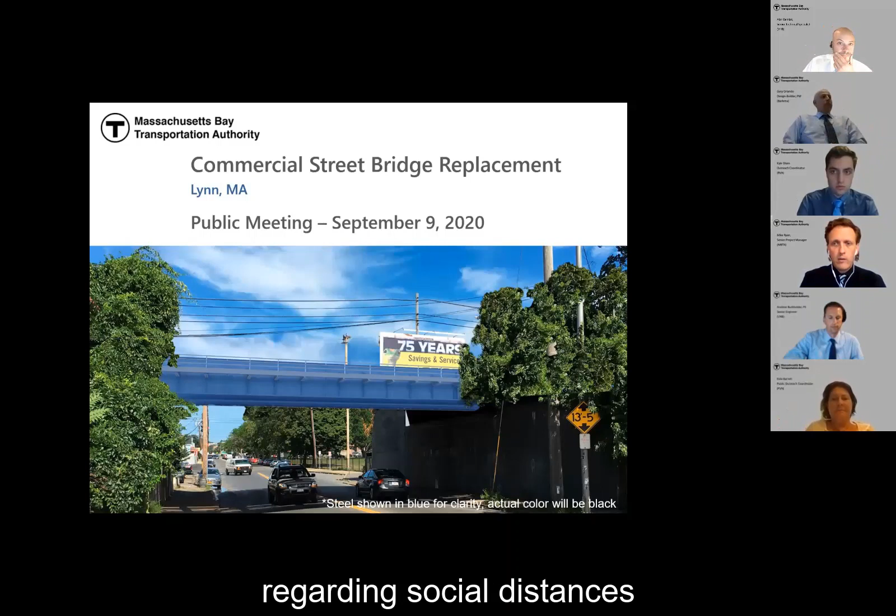An update on the governor's modified open meeting regulations. On March 12, 2020, Governor Baker issued an executive order modifying certain requirements of the open meeting law to enable public bodies to carry out their responsibilities while adhering to the public health recommendations regarding social distancing.

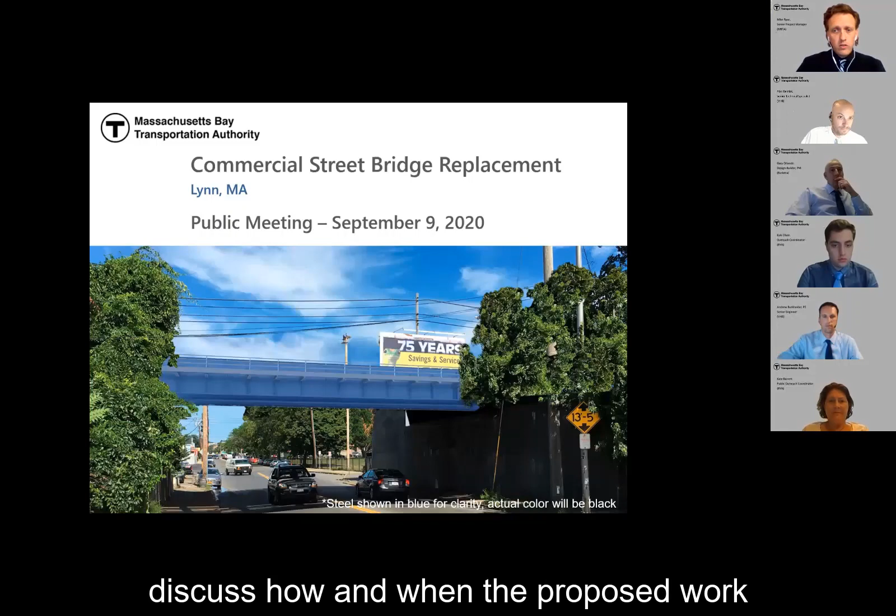We look forward to hearing your comments and questions after the presentation. First, we'll start with an overview of the project history, scope of work, and schedule. We'll discuss how and when the proposed work may affect you. This is an important project and a key component to our continuing efforts to improve the state of good repair of the commuter rail system.

The Commercial Street Bridge was originally built in 1913 and is approaching its end of useful lifespan. While we're here today discussing the Commercial Street Bridge replacement, I want to share that this is part of a larger design build program. This program includes the replacement of 6 different bridges, all contained within a single program, where Commercial Street is one of those bridges.

Accompanying me as part of this meeting is a representative from our design build team from Barletta and VHB, who I've asked to provide some additional detail and context related to the Commercial Street bridge replacement. Thank you again for your time. With that, I'll turn it over to Bob from VHB to start the presentation.

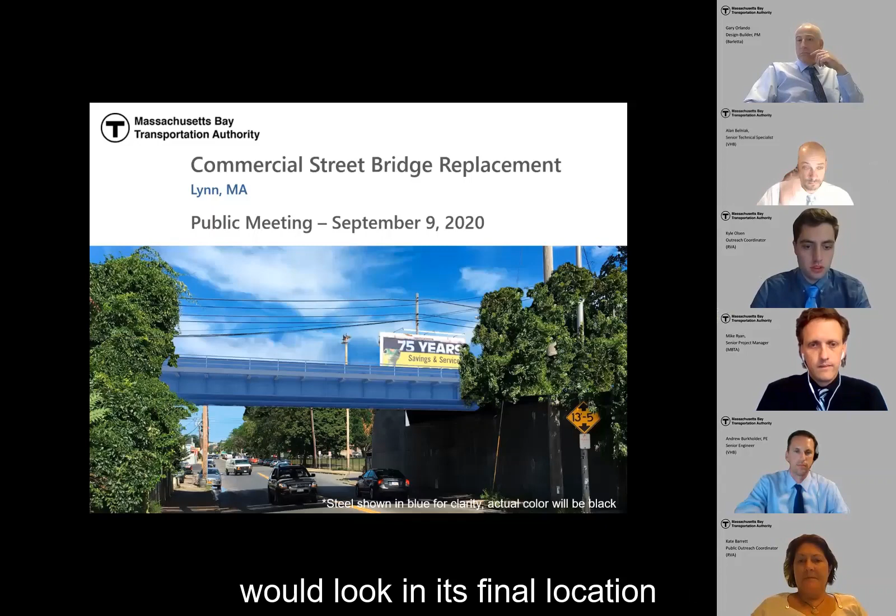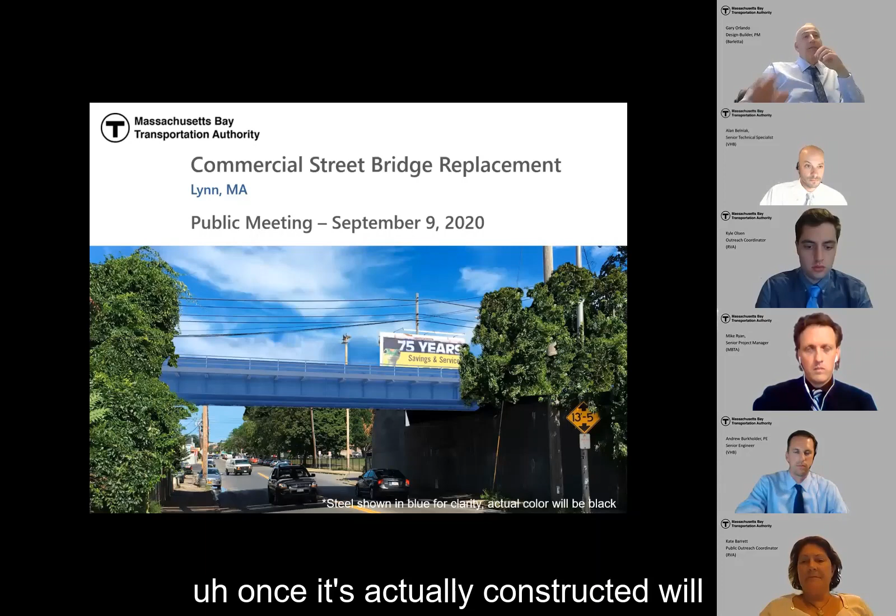Just as a point of reference, the steel, the bridge superstructure, which is the top portion of the bridge, is shown in shades of blue. That's intentional to help provide clarity in the renderings and other photos you'll see in this presentation. But the actual color of the steel, once constructed, will be black. I just wanted to point out that difference.

As Mike mentioned, himself as the MBTA Senior Project Manager for this project, Gary Orlando is the project manager from Barletta Heavy Division. Myself, Bob Penfield, I'm the design manager working for VHB, and my counterpart, Andrew Burkholder, is our senior engineer, also from VHB. We'll be meeting with you today.

So an overview of what we're here to talk about today. First, as Mike mentioned, we're going to have a quick overview of this project and its context and how it sits within a larger design build program. Then we'll get into specifics about this particular bridge: the site location and existing conditions, the project needs and goals, the proposed bridge layout and design, the construction staging, and the traffic impacts we'll see during those different construction stages.

Then we'll discuss the project schedule. Following that, we'll provide some additional opportunities for public outreach, and then we'll open the floor to any questions you might have.

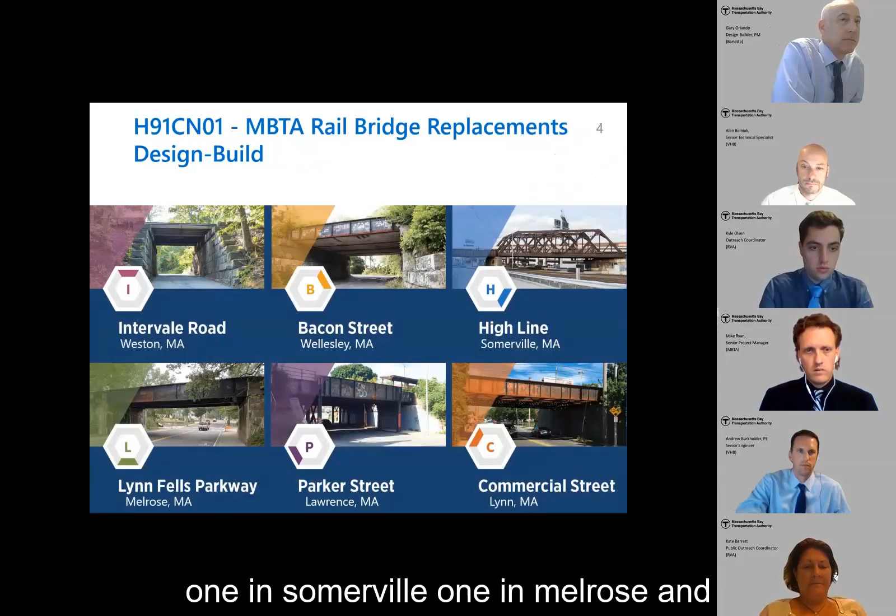As Mike mentioned, this particular project, Commercial Street, is one of 6 bridges being replaced as part of this larger design build program. We've got a bridge in Weston, one in Wellesley, one in Somerville, one in Melrose, and another in Lawrence, in addition to the one here in Lynn.

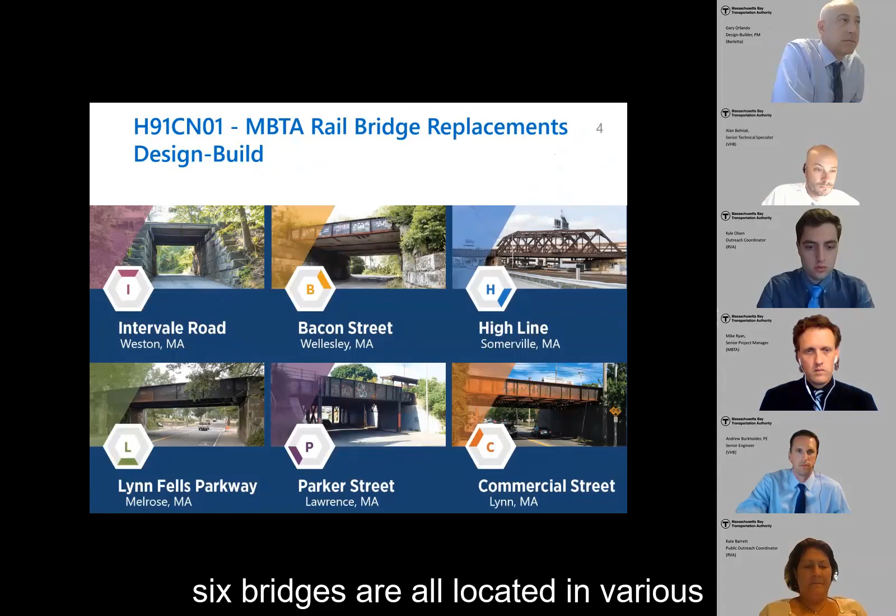As you can see, all of these 6 bridges are all located in various locations within the MBTA's commuter rail system. In our case here, we're on the Newburyport/Rockport line.

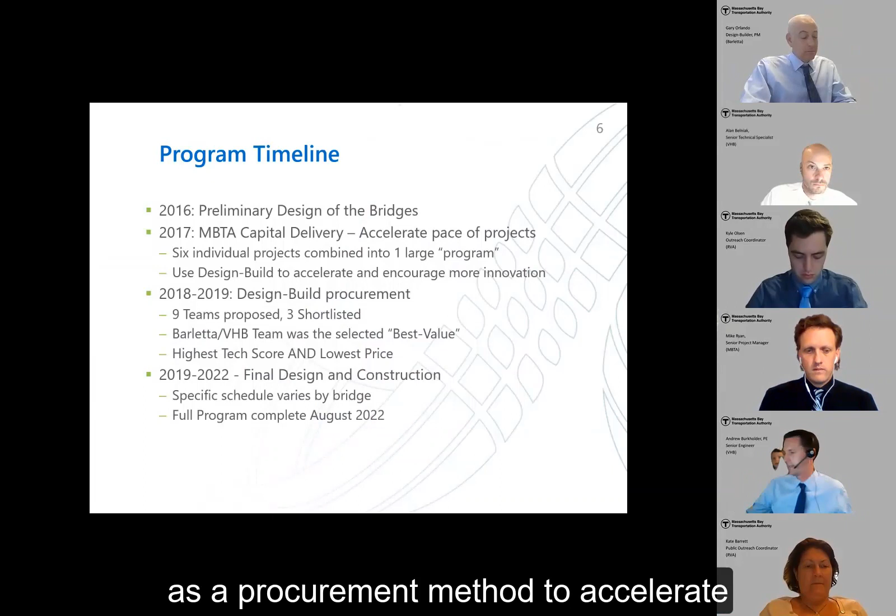To give you an idea of the program timeline, back in 2016 the preliminary design of each of these 6 bridges had begun. In 2017, the MBTA's Capital Delivery Group was looking to accelerate the pace of their infrastructure improvement projects, so they decided to combine 6 individual projects into one large program, using design build as the procurement method to accelerate the pace and encourage more innovation. Design build is when a team comprised of both the contractor and the engineer works as a single team.

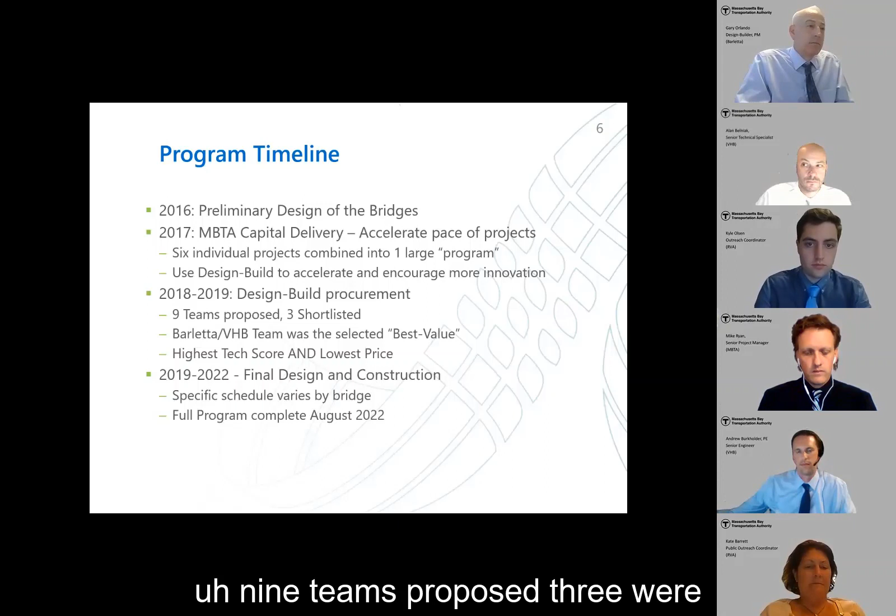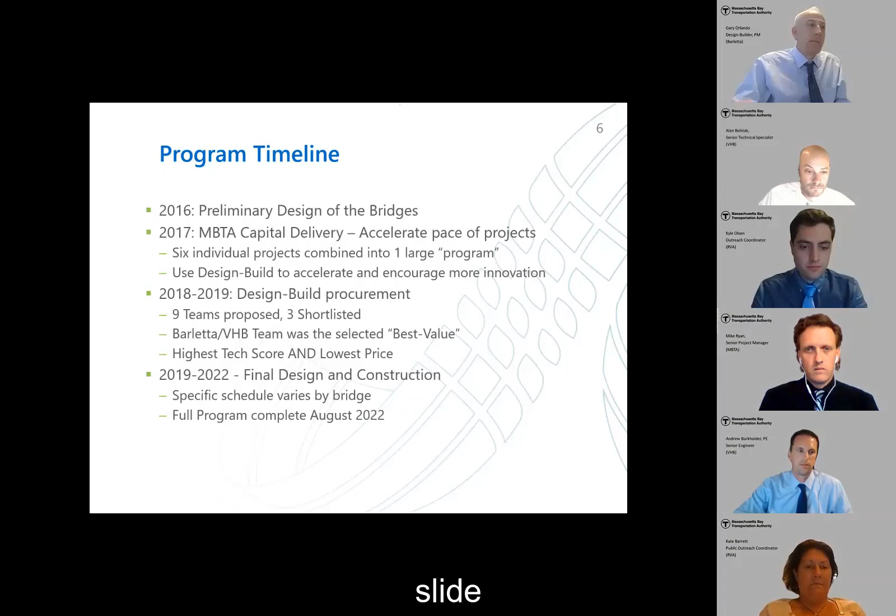During 2018 and 2019 was the procurement for this program. 9 teams proposed, 3 were shortlisted, and ultimately the Barletta VHB team was selected as the best value. From 2019 to 2022, we are in the midst of the final design and the construction. While the specific schedule varies by each of those 6 bridges, the full program will be all complete by August of 2022. We'll get into some specifics about the schedule for this project in just a little bit.

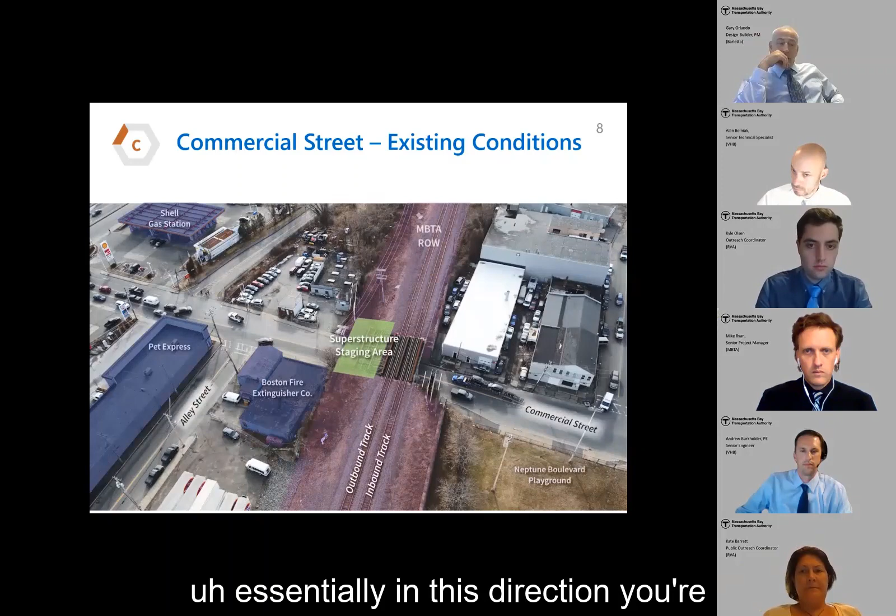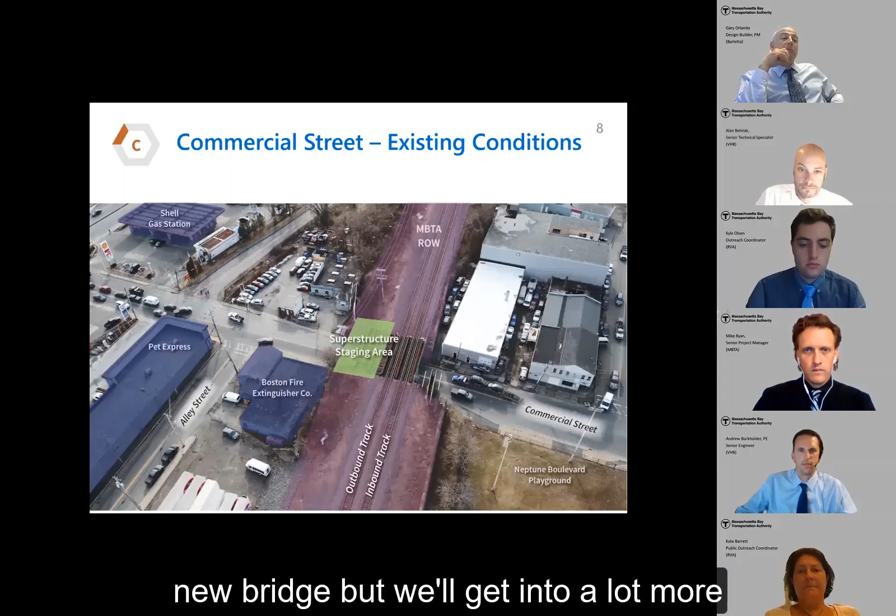In this satellite view, shaded in purple is the MBTA's right of way, and you can see the inbound and outbound tracks. In this direction, you're facing inbound towards the city of Boston. You can see Commercial Street crossing underneath the MBTA's tracks, and some of the various businesses in that location are highlighted. Shaded in green is the superstructure staging area, which will be the area where we partially construct this new bridge. We'll get into a lot more detail on that in just a little bit.

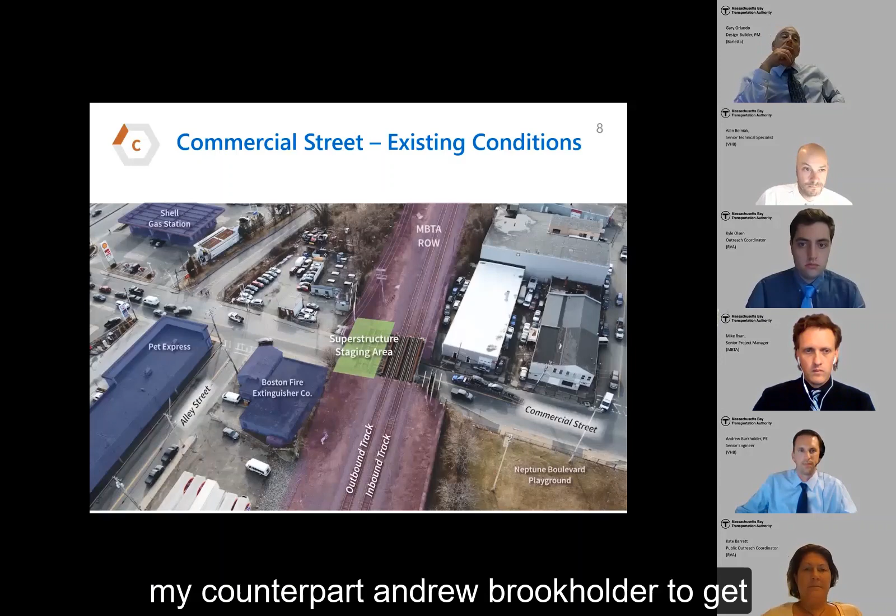With that, I'd like to turn it over to my counterpart, Andrew Burkholder, to get into some of the more specifics. Thanks, Mike.

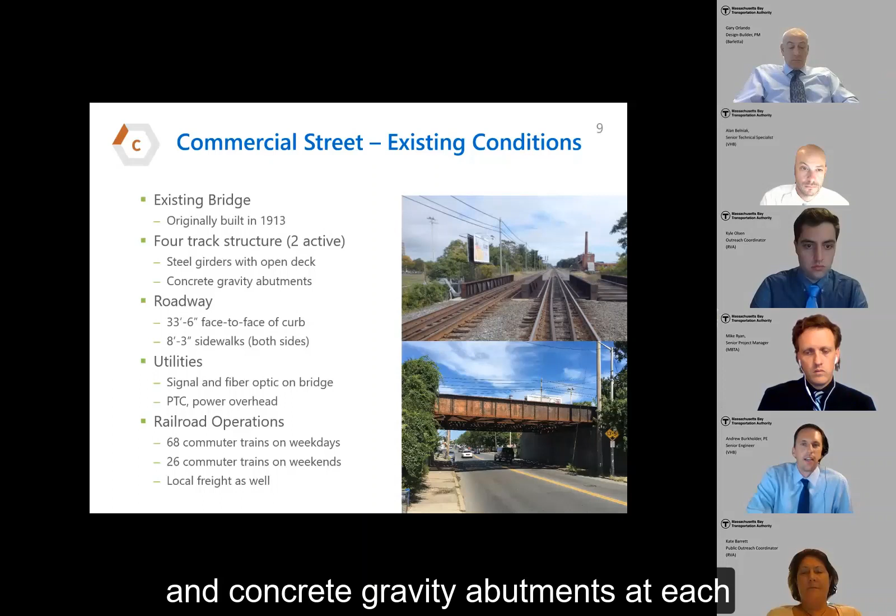So we wanted to first take a look at the existing conditions for the Commercial Street Bridge. As Mike mentioned, the original structure was built in 1913. It was originally a 4-track structure, and only 2 of those are active today, as you can see in the picture on the right-hand side of the screen. The bridge itself is composed of steel girders with an open deck and concrete gravity abutments at each end.

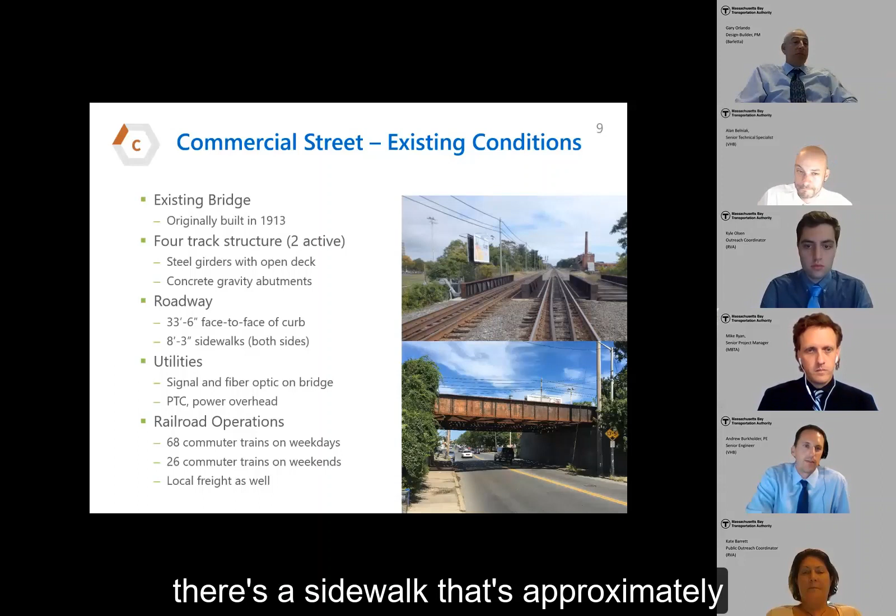Commercial Street underneath the bridge is about 33 feet 6 inches from face to face of the curb, and on each side there's a sidewalk approximately 8 foot 3 inches wide. There are a lot of utilities in the area—signal and fiber optic lines carried by the bridge, power overhead, and a lot of utilities in the street, so it's a pretty busy area at the bridge location.

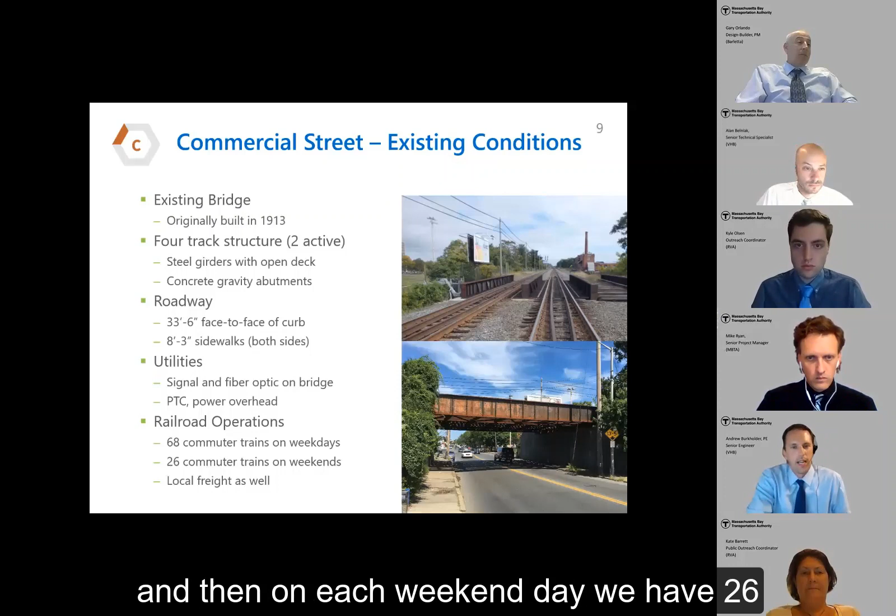In terms of operations, on any given weekday there are 68 commuter trains that use the bridge, and on each weekend day there are 26 commuter trains using the bridge. There's also some local freight that uses the bridge as well.

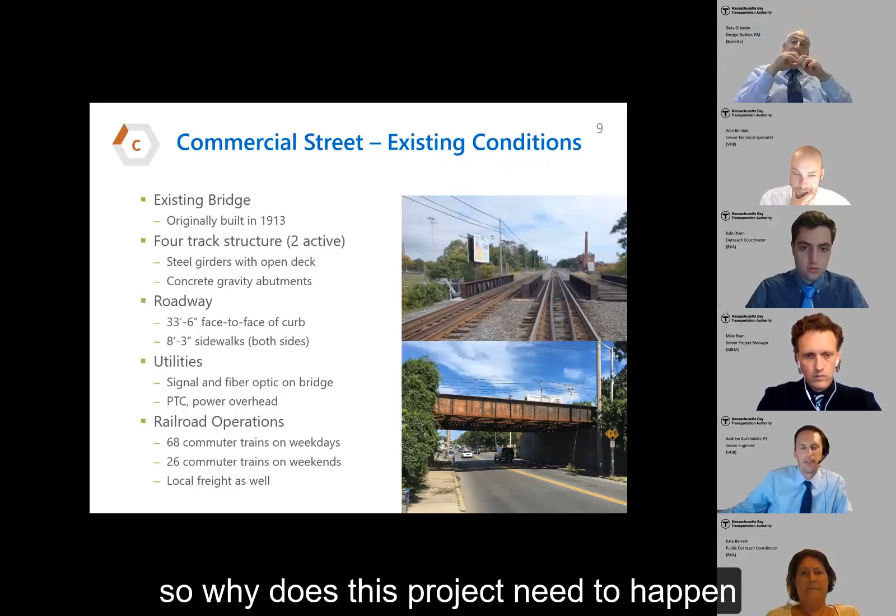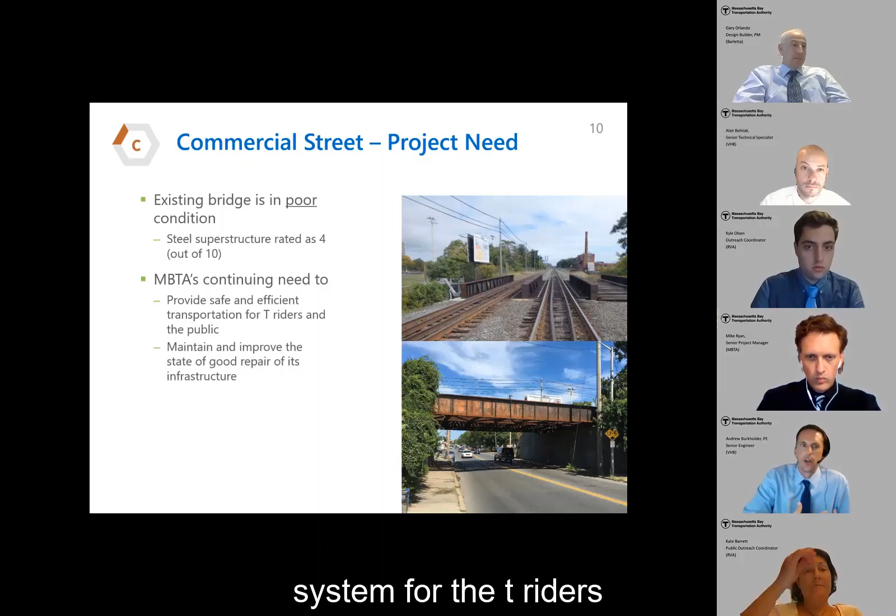So why does this project need to happen? The reason is this existing bridge is in poor condition. As Mike mentioned, it's outlived its useful service life—the steel superstructure is rated a 4 on a scale of 1 to 10, so again, it's in poor condition. For the MBTA's goal of continuing to provide a safe and efficient transportation system for T-riders, and to maintain its state of good repair, this bridge was selected to be replaced.

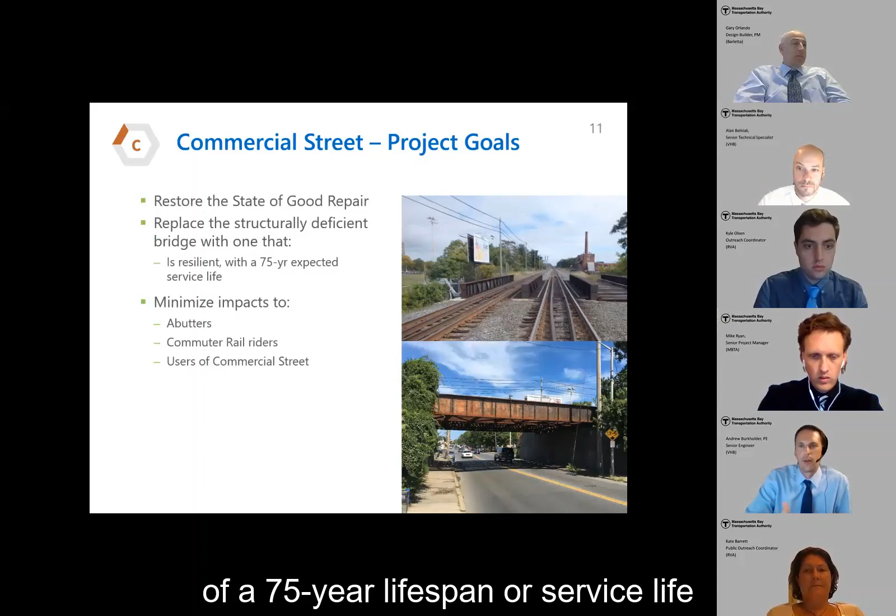The project goals here are to maintain that state of good repair and to replace this bridge with one that's resilient and provides a minimum of a 75-year lifespan or service life. We want to complete this project and replace the bridge while minimizing impacts to abutters in the area, the commuter rail riders, and the users of Commercial Street. We'll go into how we're going to do that in a couple of slides.

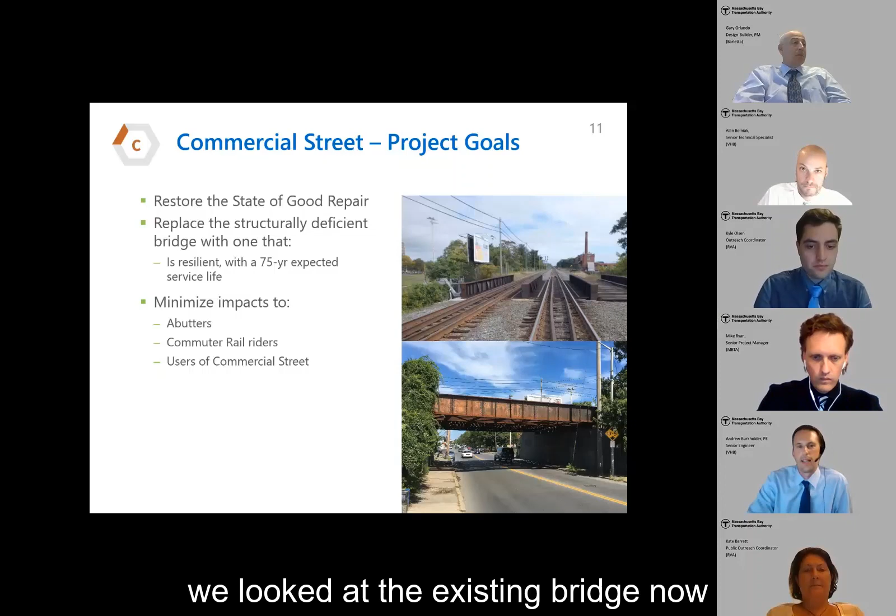So we looked at the existing bridge, now getting into the design of the new bridge. Again, as I mentioned, it's a complete bridge replacement.

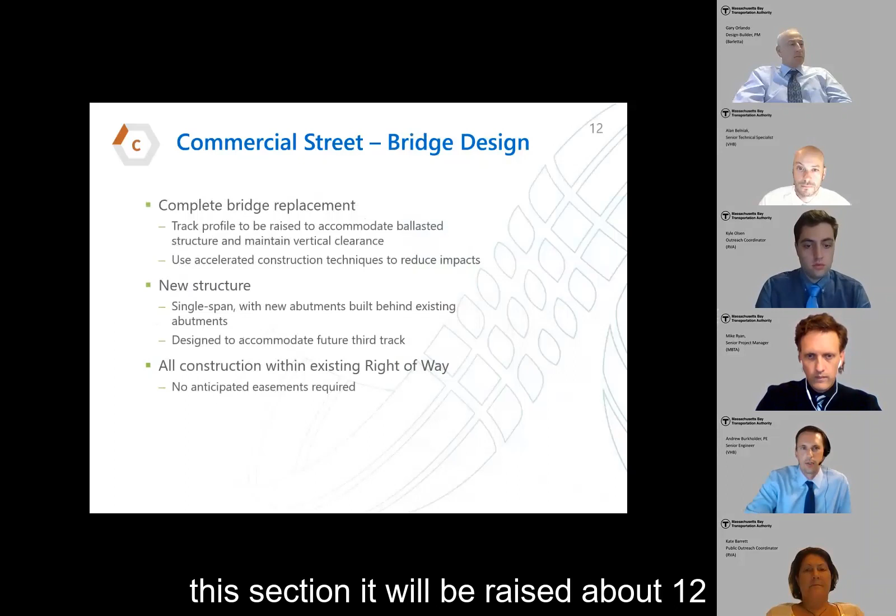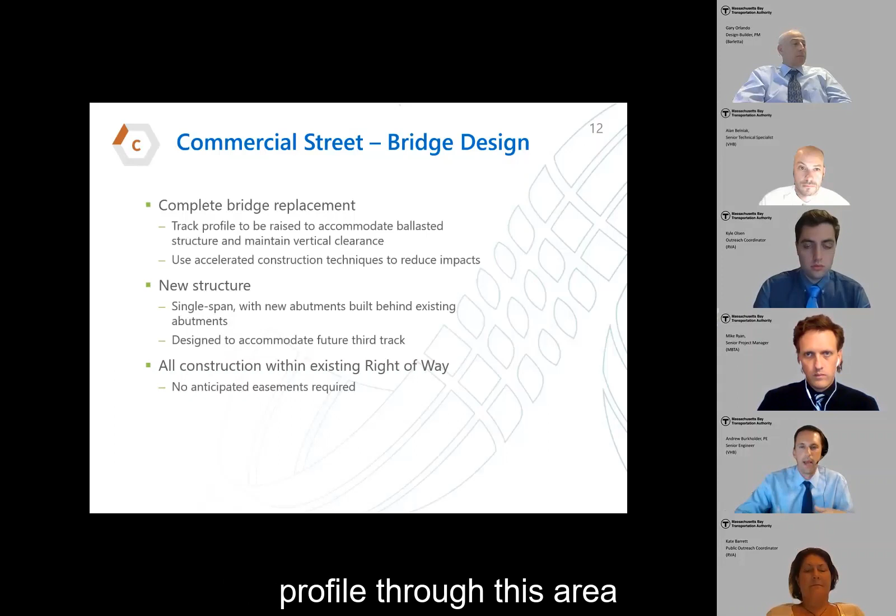The track profile will be raised through this section, about 12 inches, to accommodate a new ballasted structure. The existing structure has ties that sit right on the steel components. The new structure, as is typically built for railroad bridges, needs to accommodate the ballast, the stone, and the railroad tracks, so we need to raise the profile through this area.

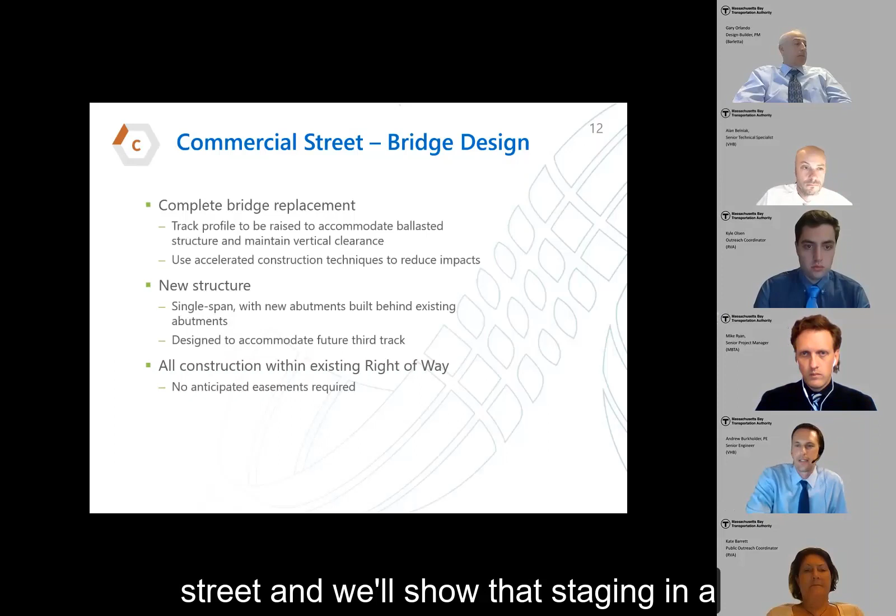We are going to use some accelerated bridge construction techniques to reduce impacts to abutters, T-riders, and users of Commercial Street, and we'll show that staging in a minute.

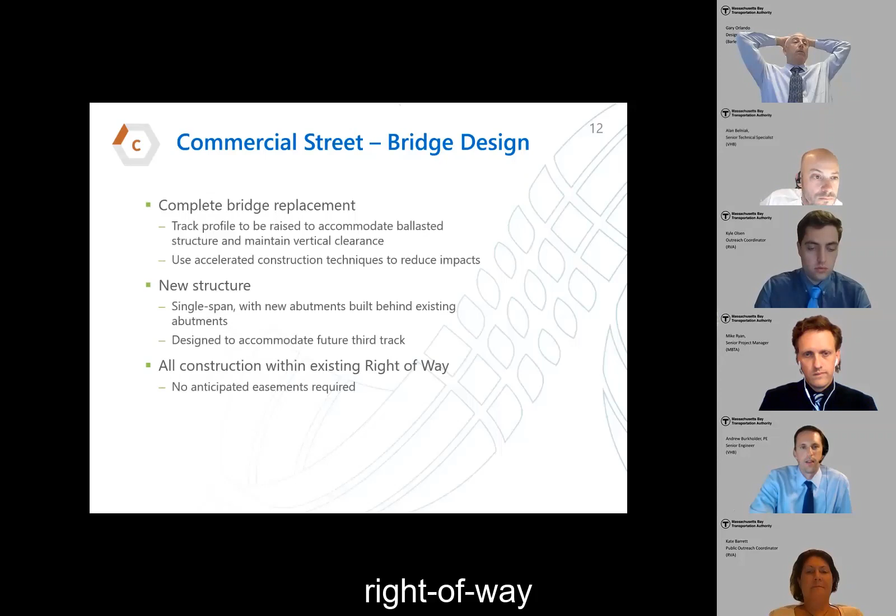The new structure will be a single span similar to the existing, and the new abutments will be built behind the existing abutments. We're also designing the superstructure to accommodate future expansion. All the construction is anticipated to be within the existing right-of-way.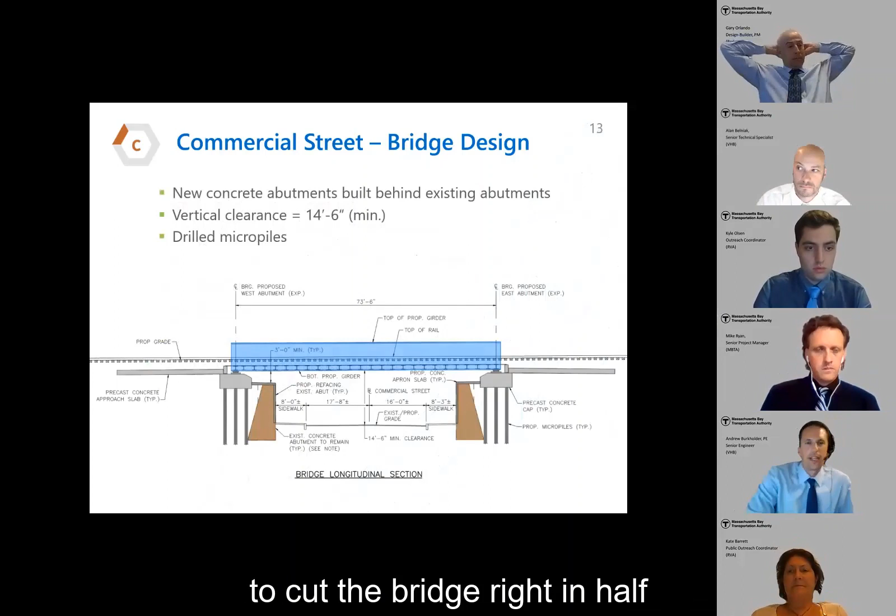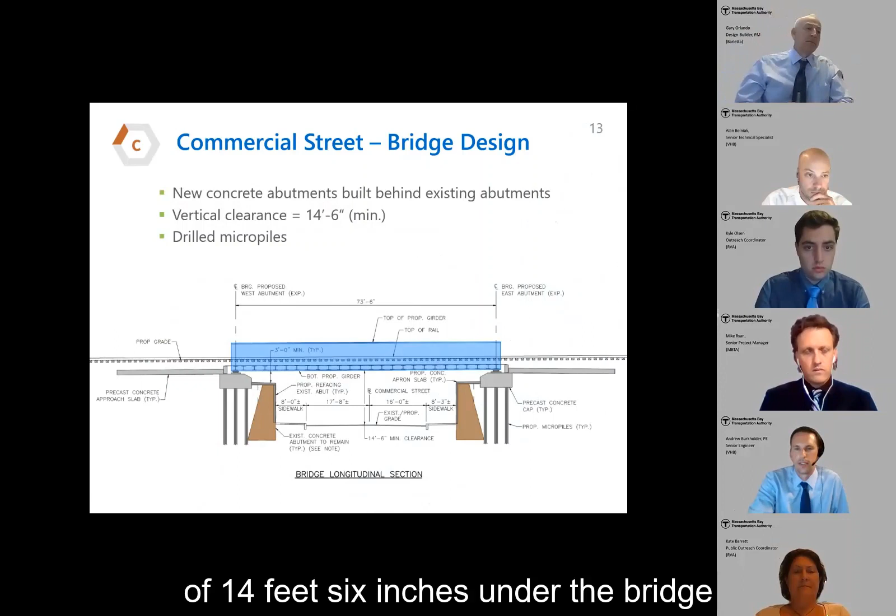The graphic at the bottom of the screen looks at the bridge as if standing on Commercial Street, cut right in half. You can see the existing abutments in brownish color, and the new abutments shown in gray behind the existing ones. These are supported by micropiles, which are round steel piles drilled into the ground and filled with grout. We'll be providing a vertical clearance of 14 feet 6 inches under the bridge.

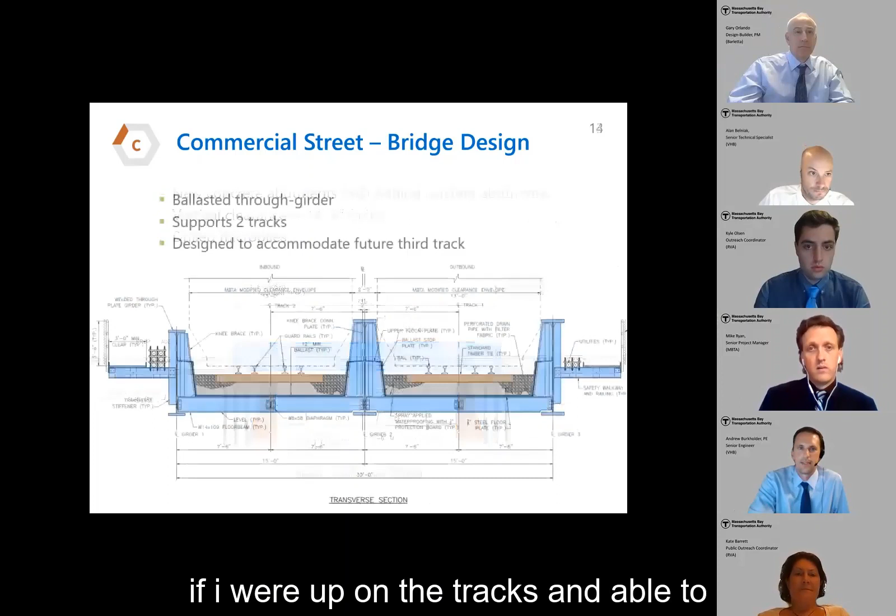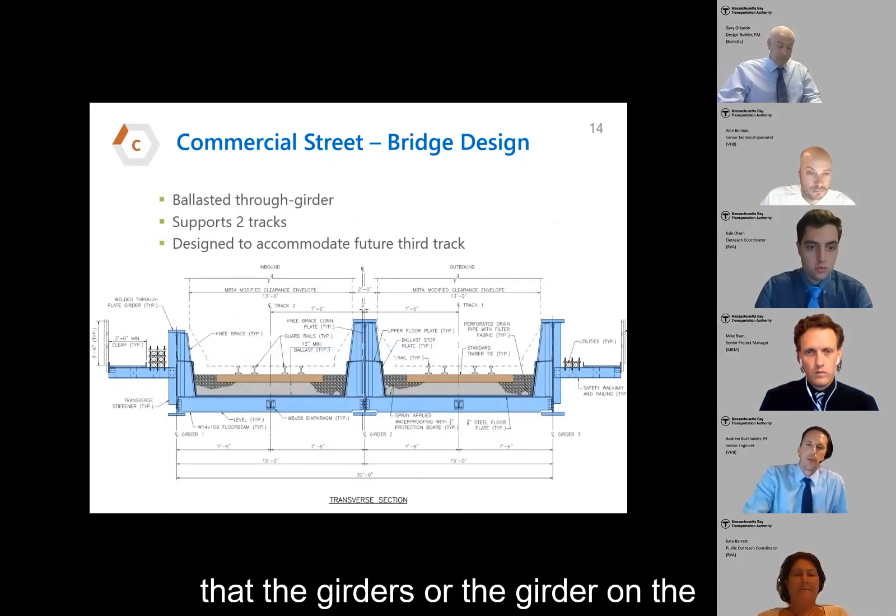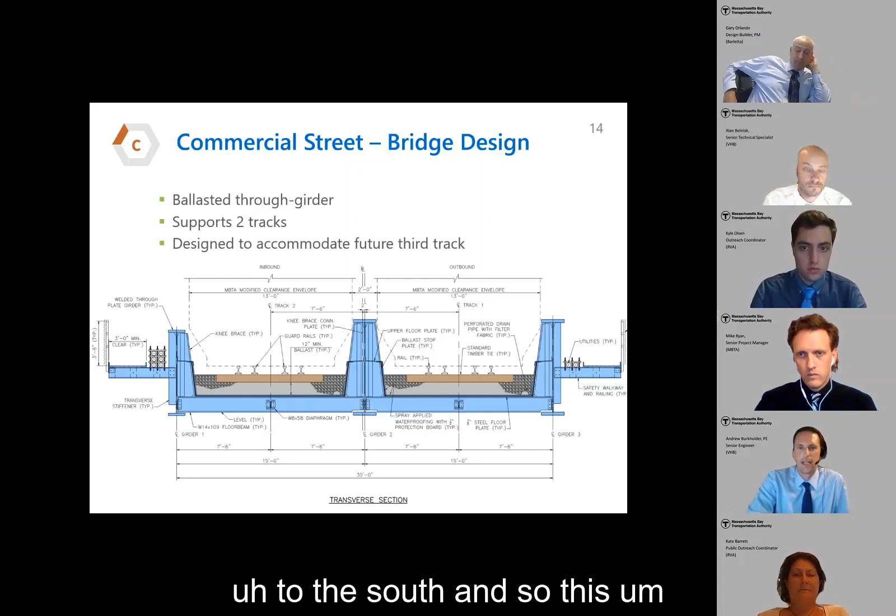This graphic shows a transverse section, as if cutting the bridge in half from up on the tracks. You can see the ballasted through girder design: gray is the stone ballast, brown rectangles are the ties, and blue represents the steel structure. The bridge we put back will accommodate 2 tracks, but notice the girder on the right side is larger than on the left, because this bridge is designed to accommodate future expansion to the south. New tracks can be added to the south side of the bridge without having to reconstruct this structure.

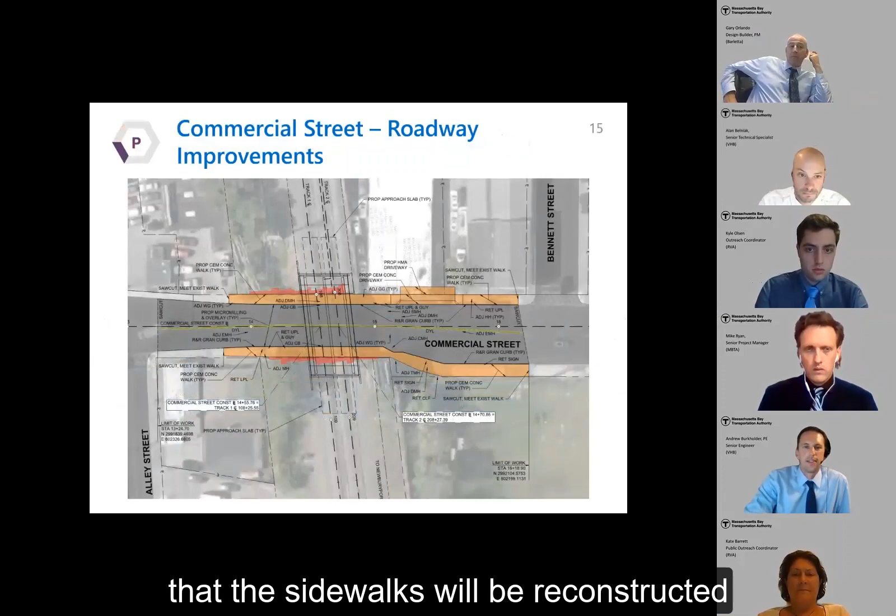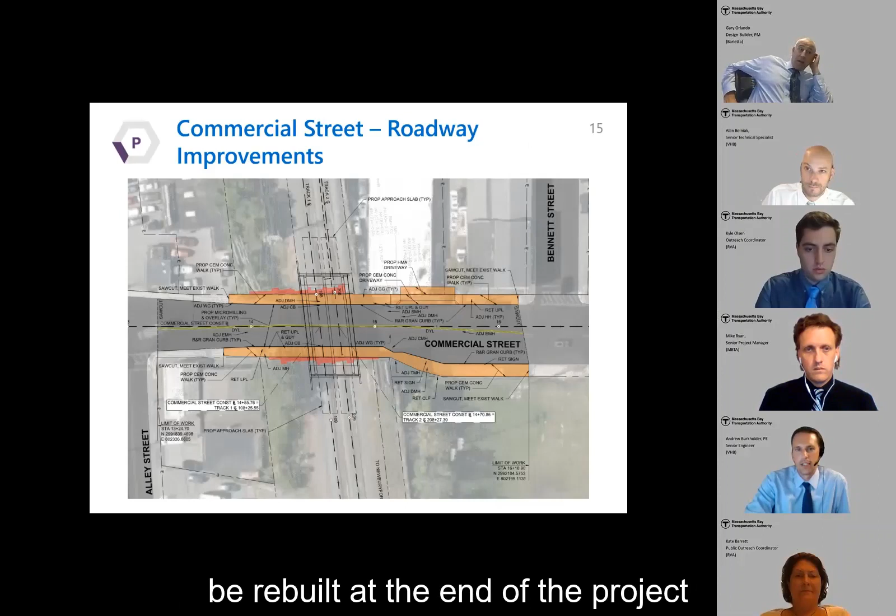This is an overhead plan view showing the extents that the sidewalks will be reconstructed and Commercial Street repaved, essentially from Alley Street to Bennett Street. Commercial Street will receive new paving and the concrete sidewalks will be rebuilt at the end of the project, shown in the orangish color.

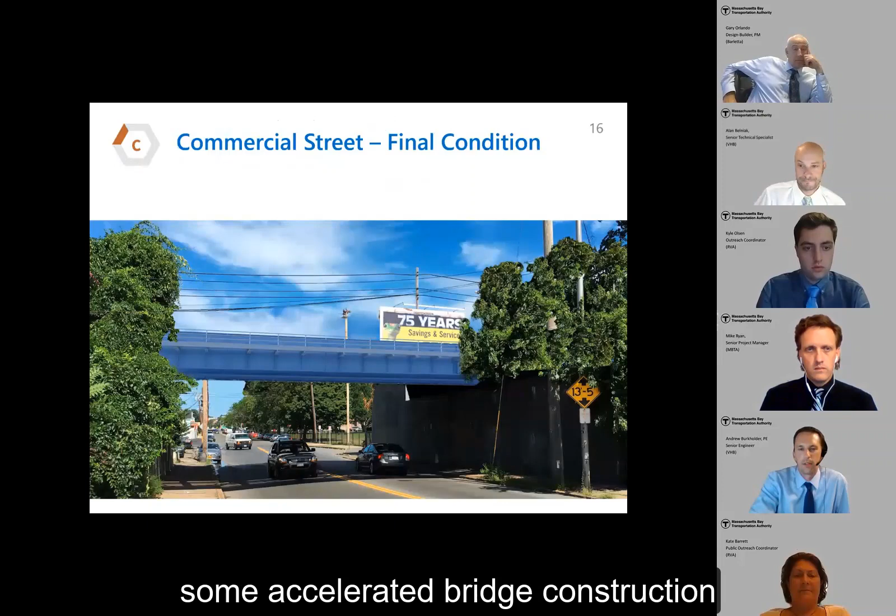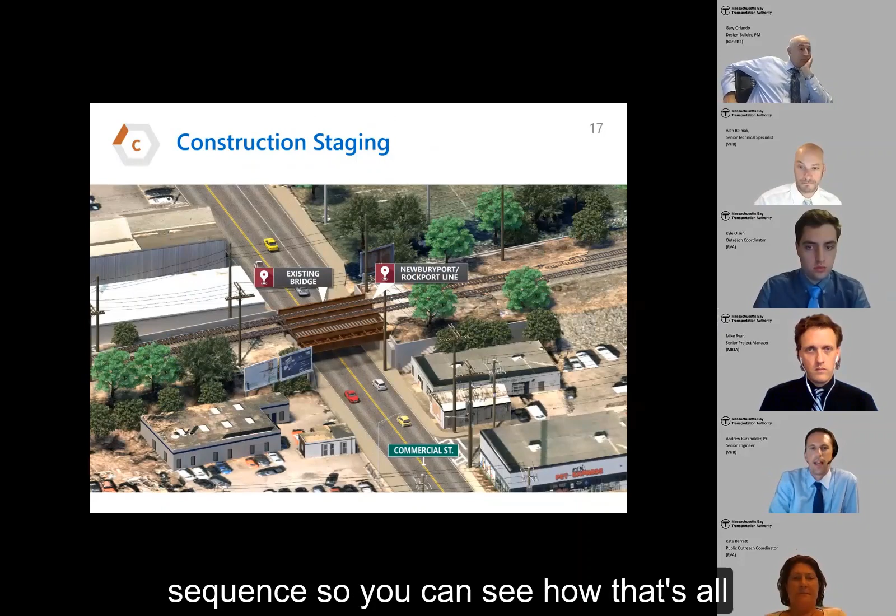You saw this picture at the beginning of the slideshow, but this is the completed final condition with the steel bridge shown here in blue, although it will be black in real life. I mentioned some accelerated bridge construction techniques and impacts to Commercial Street and the T-Rider, so I wanted to step through the construction sequence so you can see how that's all going to work.

We now have a graphic on the screen looking from south to north, showing the existing bridge, the existing tracks, the abandoned bays, and Commercial Street.

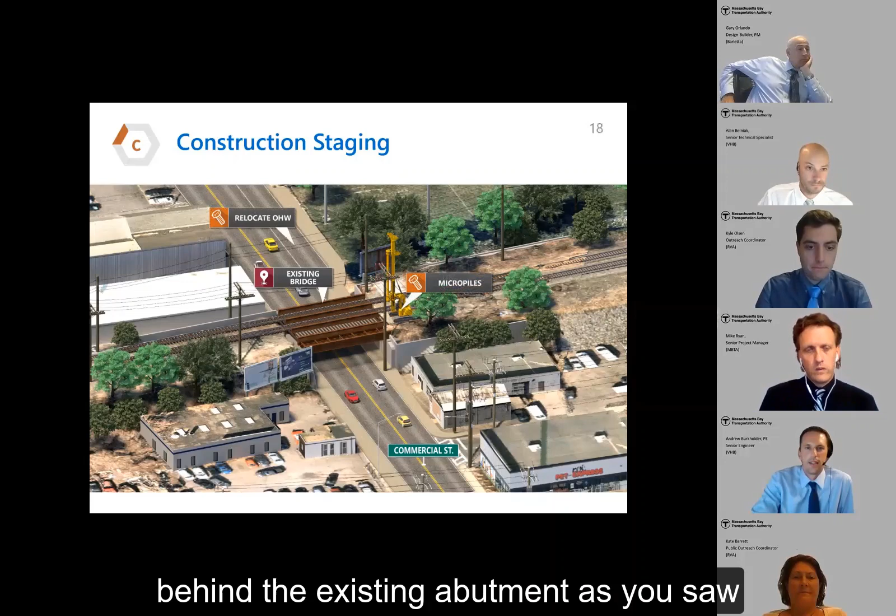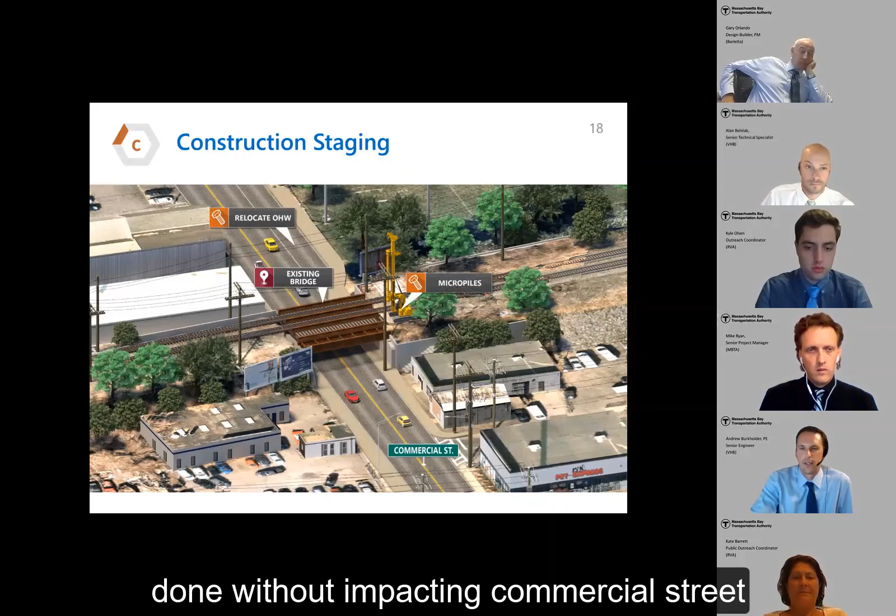Our first step would be to install the micropiles behind the existing abutment, as you saw in the graphic. The machine shown here works up at the track level and installs the micropiles behind the existing abutments. This is done without impacting Commercial Street and without closing or impacting the commuter rail lines.

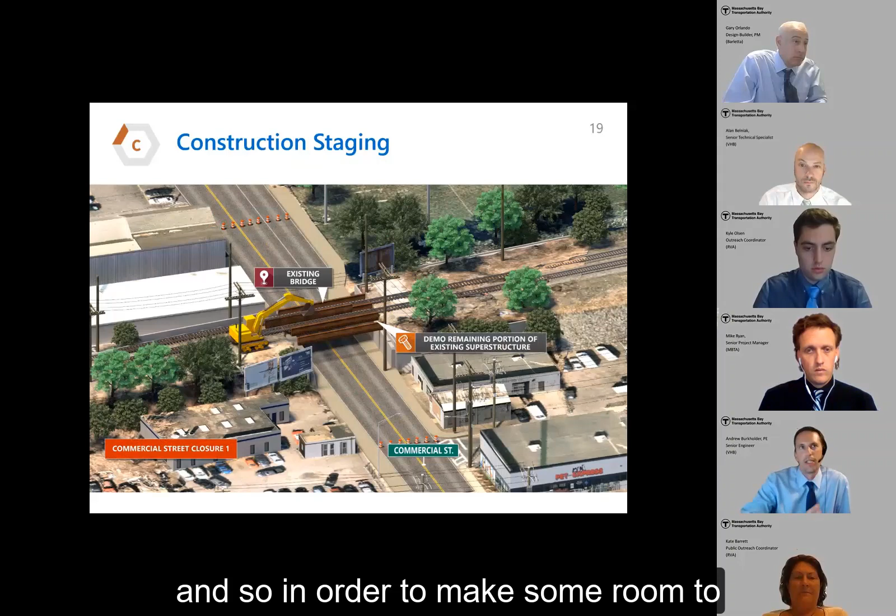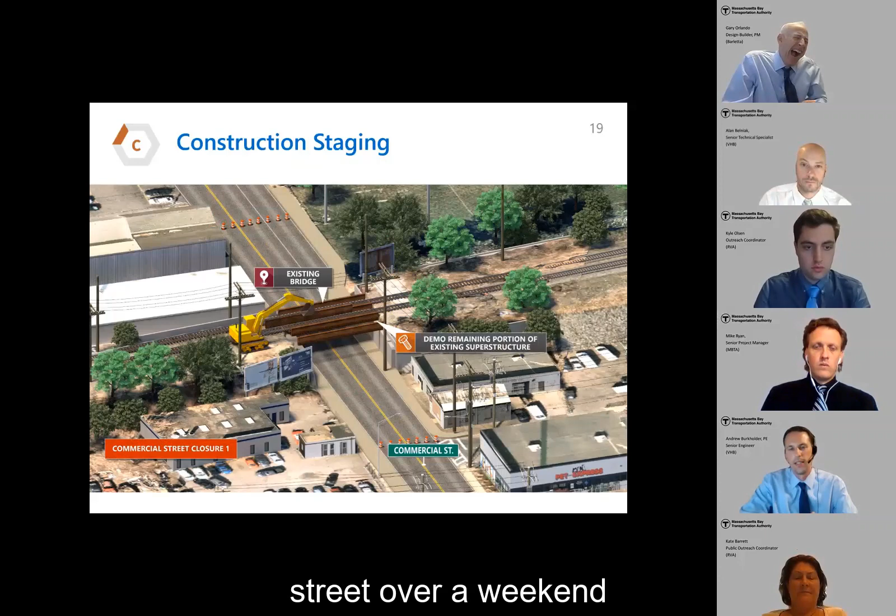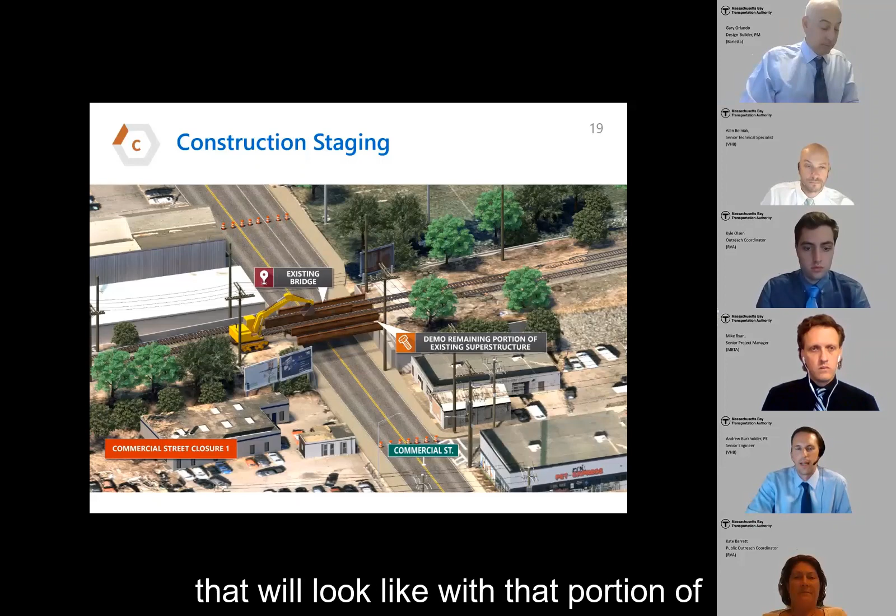And this slide is just showing what that will look like with that portion of the bridge removed.

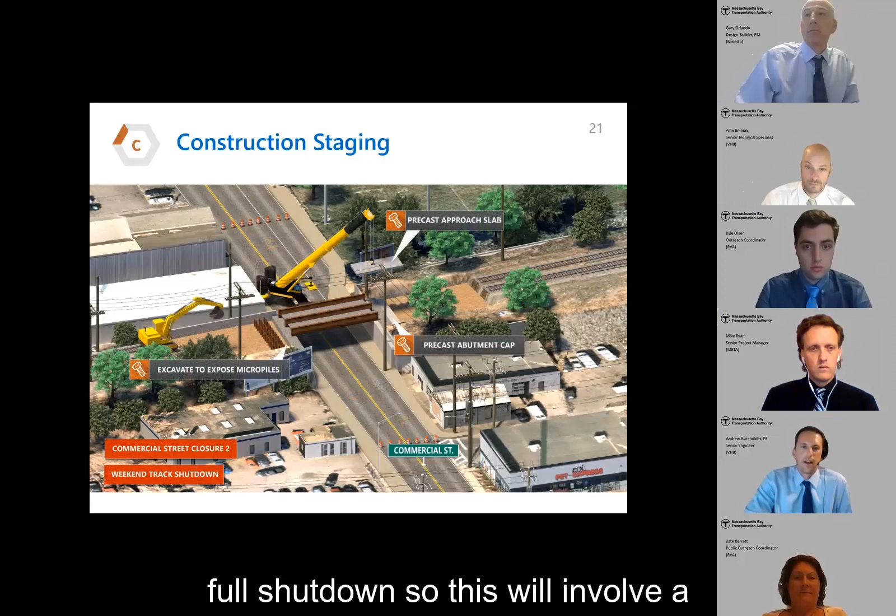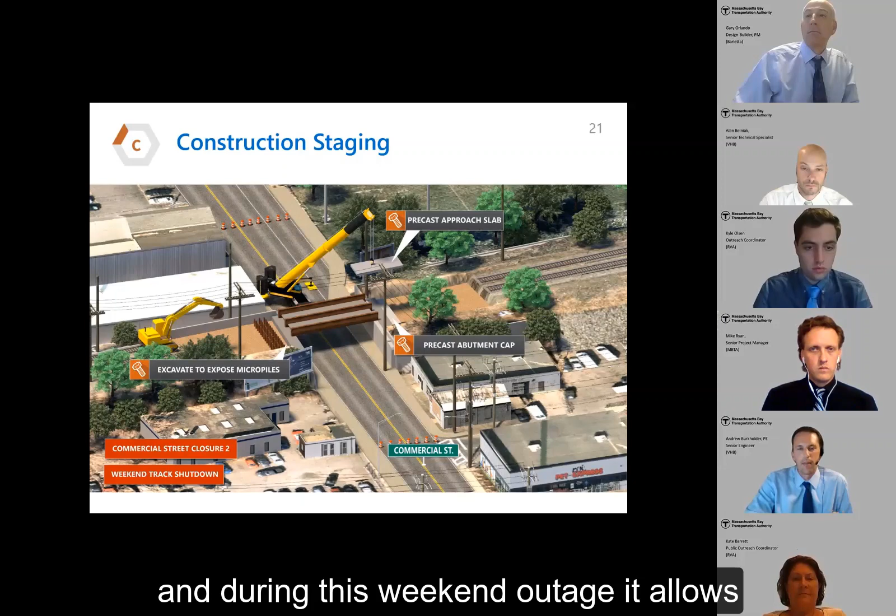The next step would involve what we call full shutdown. This will involve a weekend track outage of the line and a weekend shutdown of Commercial Street. We're considering a weekend to be after the last train on Friday evening until the first train Monday morning, so during that time there would not be trains running on this line or traffic on Commercial Street.

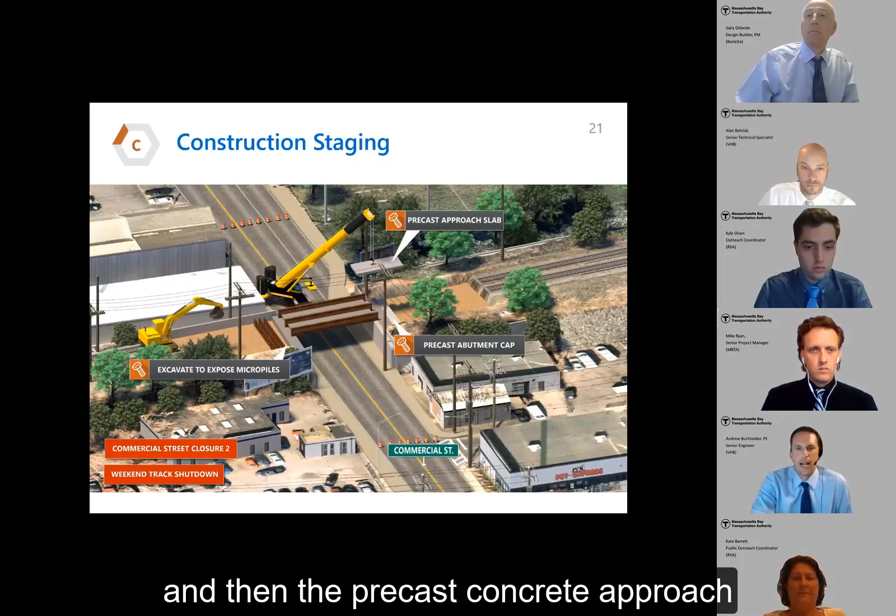During this weekend outage, it allows us to excavate down to the previously installed micropiles, install precast concrete caps, abutment caps that the girders will rest on, and then the precast concrete approach slabs.

Here you can see all of that has been installed. This is still during that same weekend closure.

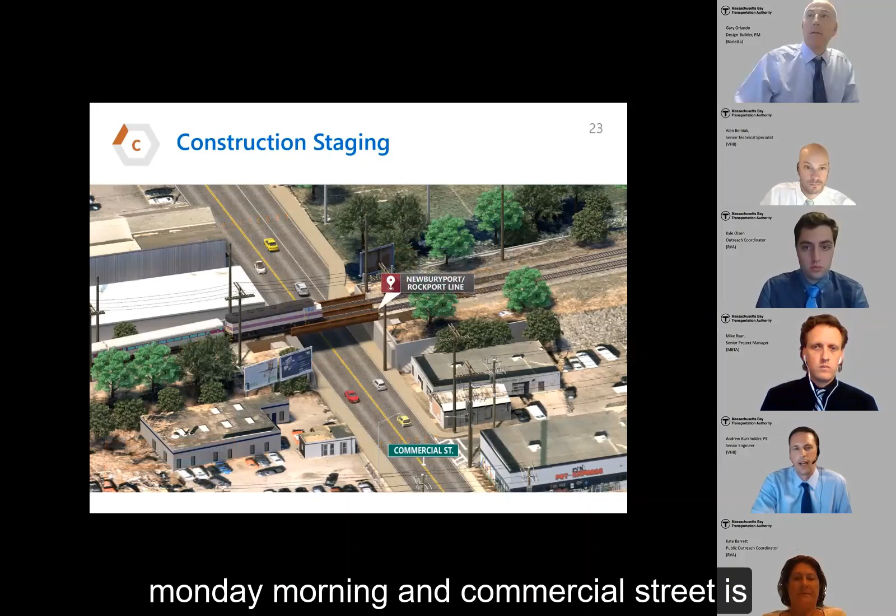And then that gets covered up, buried by Monday morning to allow the trains to run again first thing Monday morning, and Commercial Street is reopened.

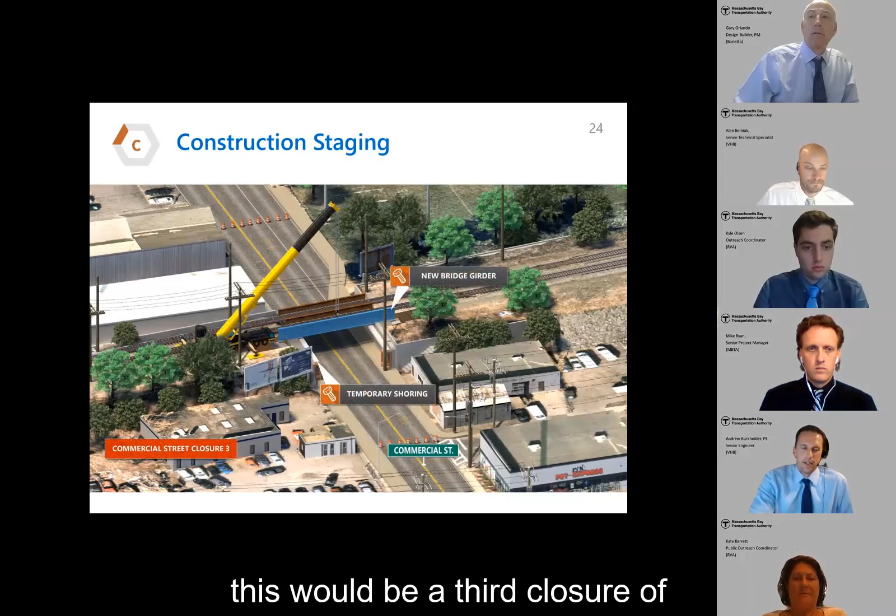So the next step is to assemble the new superstructure next to the existing. This would be a third closure of Commercial Street over a weekend, again because of the overhead work above the roadway and for safety precautions. So we would install the new bridge girders and new superstructure, assemble that right next to the existing.

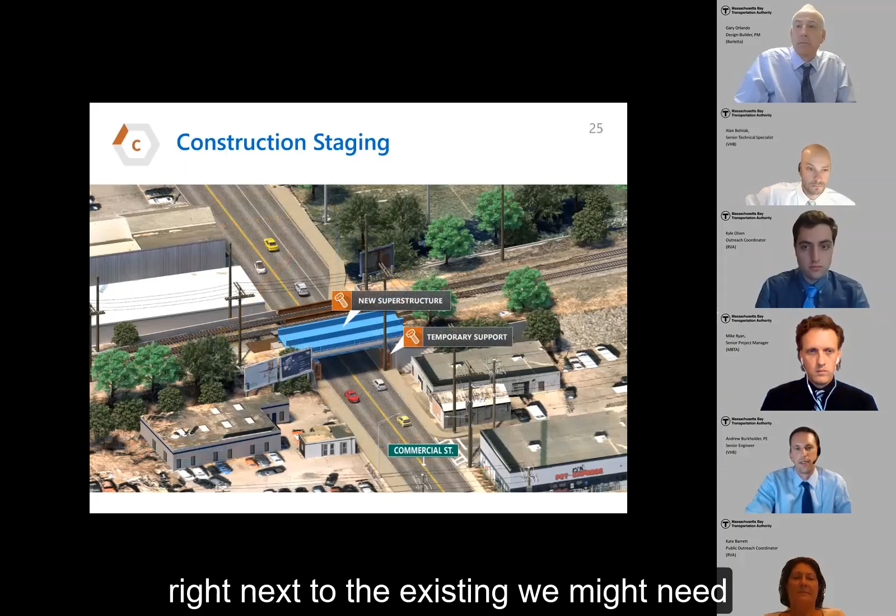This slide shows that new superstructure right next to the existing. We might need some temporary supports to hold that in place temporarily.

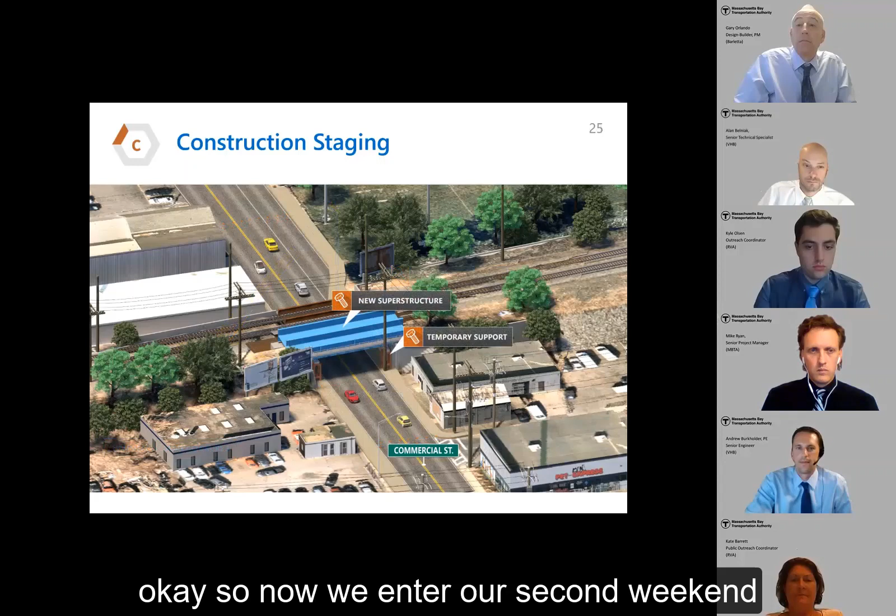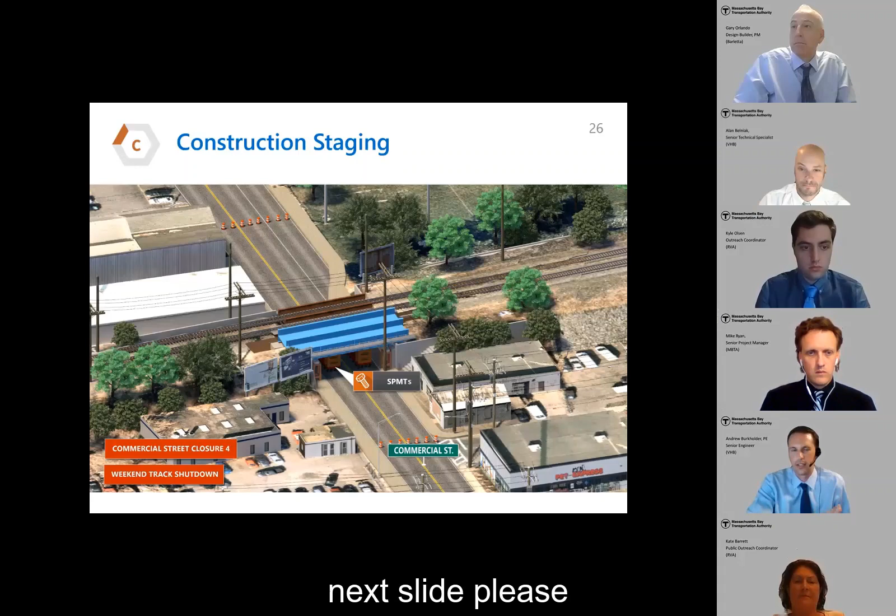Now we enter our second weekend full shutdown. Again, this involves the track shutdown and the Commercial Street closure, Friday night to Monday morning. This allows us to use some SPMTs, self-propelled modular transporters, basically a big flatbed with lots of wheels that can lift the structure and drive it to where we need it. So those would get installed.

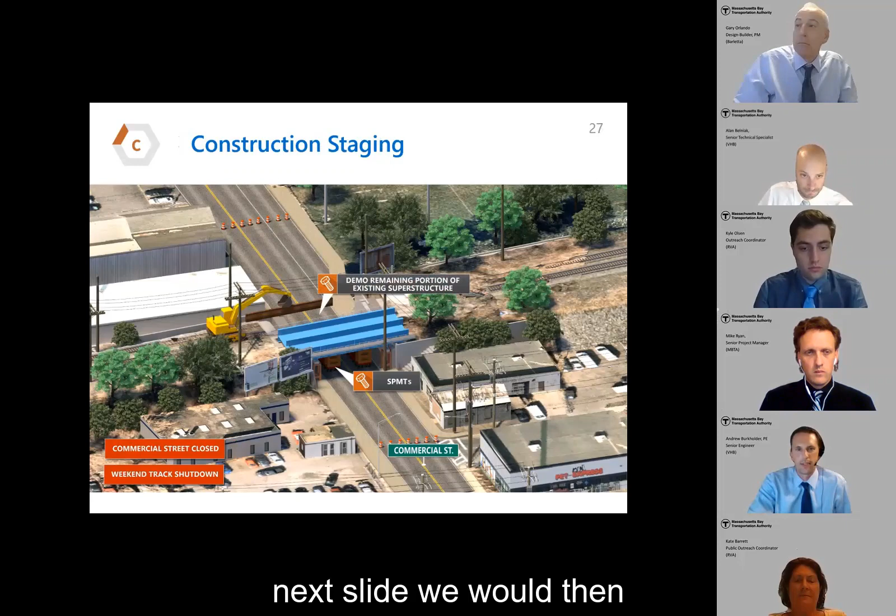The existing tracks would be removed and the remaining portion of the existing superstructure would be demolished. We would then simply move the new superstructure into its final location using the SPMTs.

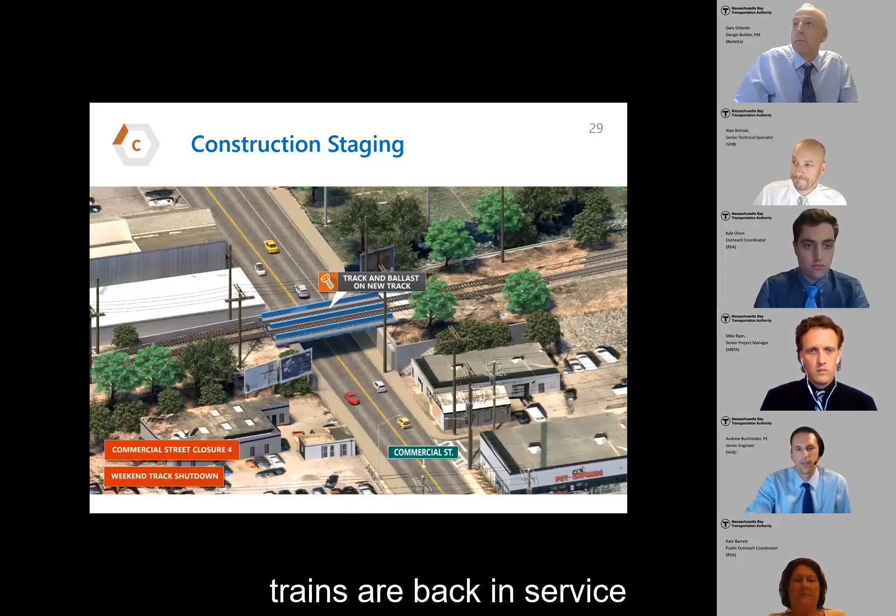And then reinstall the ballast, the stone, and the new track. Again, this is still during that same weekend closure. And then Monday morning, trains are back in service, and Commercial Street is back open to traffic.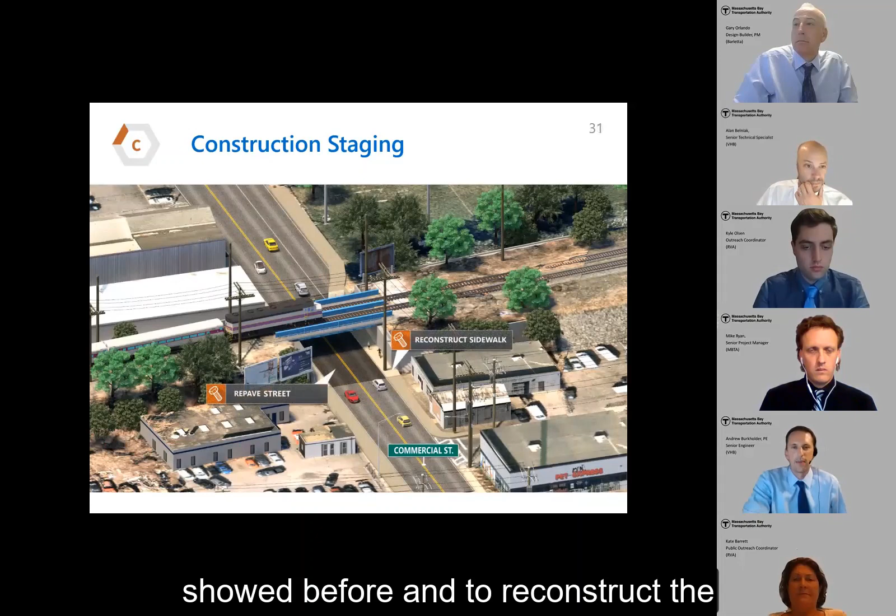The final step of the project is to repave the portion of Commercial Street that I showed before and to reconstruct the concrete sidewalks to the limits that I showed previously. And then that completes the Commercial Street Bridge project.

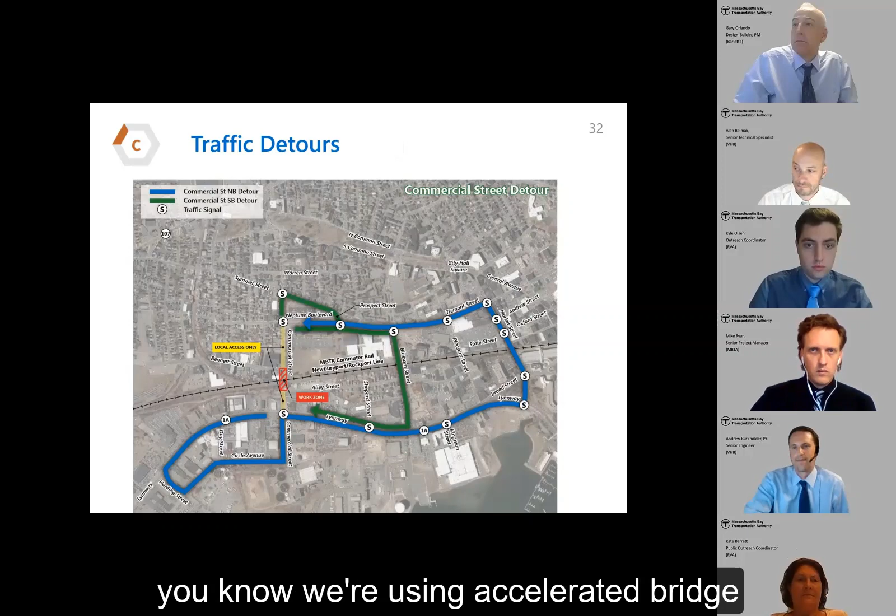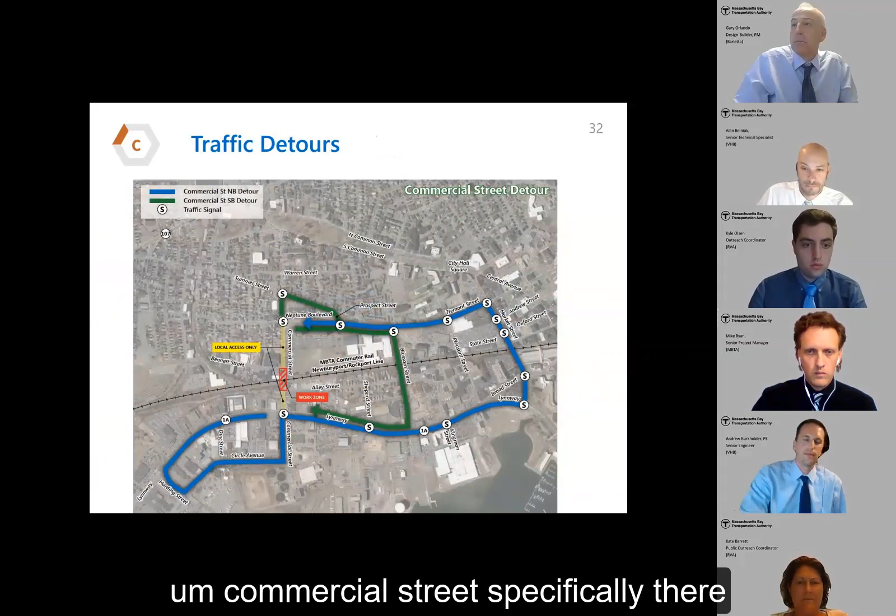I think Bob's going to get into some of those detours during the closure. Thank you, Andrew. As Andrew mentioned, we're using accelerated bridge construction techniques to reduce the impacts to both the commuter rail and the commuters that use the commuter rail, and also the traveling public that uses the streets around Lynn, Commercial Street specifically.

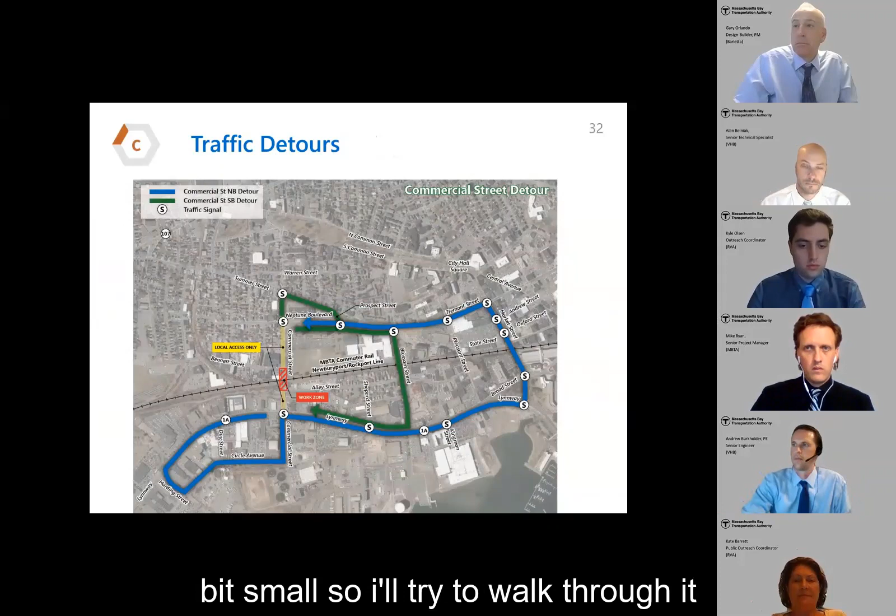There are a handful of instances, four to be exact, where Commercial Street underneath the bridge would need to be closed over a weekend. During those weekends, we would establish a detour, which is what we're showing on the screen here. I know it's a little small, so I'll try to walk through it.

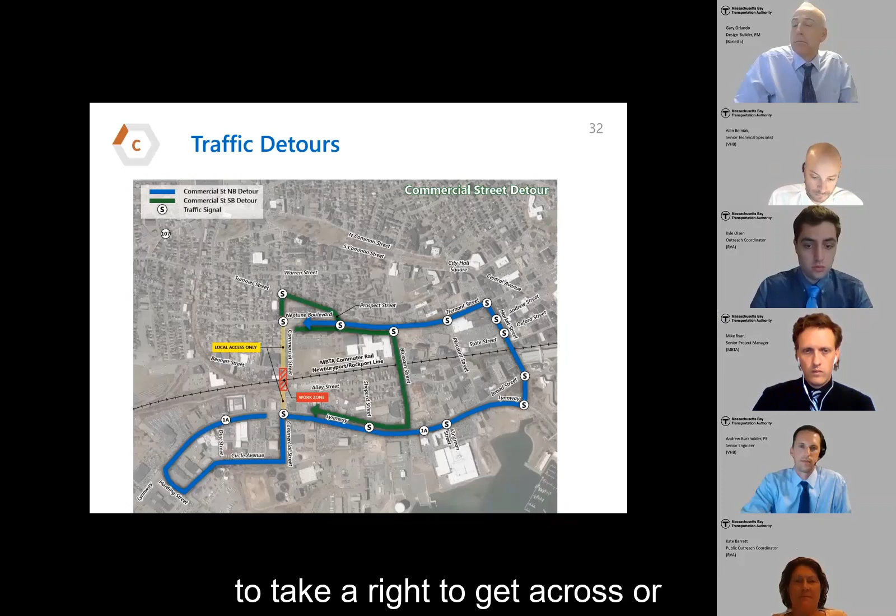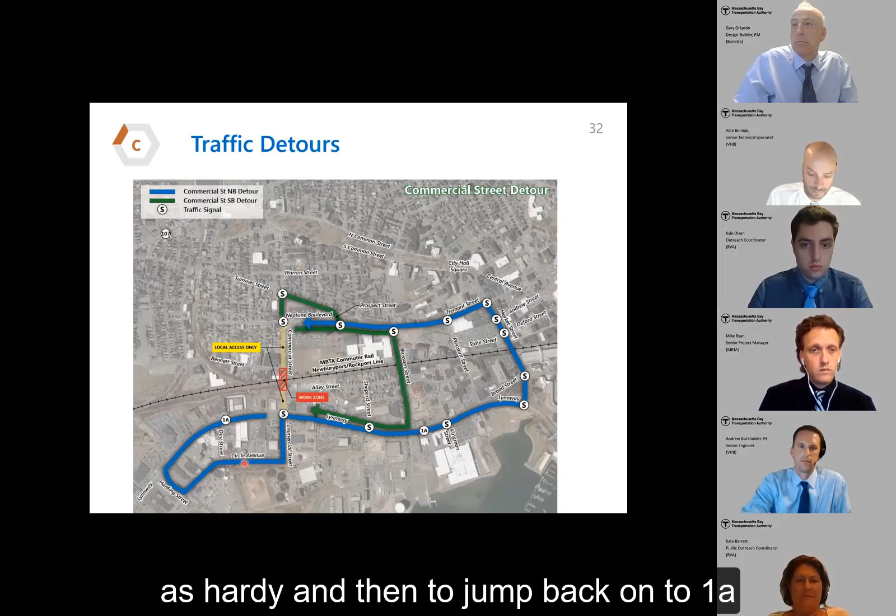If you were traveling inbound, southbound on the Lynnway, you would have several opportunities to take a right, starting at Market Street and Pleasant Street or Blossom Street, to get across or underneath the tracks. If you continued southbound on the Lynnway and got to Commercial Street and tried to take a right, well, Commercial Street would be closed, so you'd be asked to take a left, go down Commercial Street, Circle Ave. You could take Day, but I think we signed it as Hardy, and then jump back onto 1A and get yourself back around northbound onto the Lynnway.

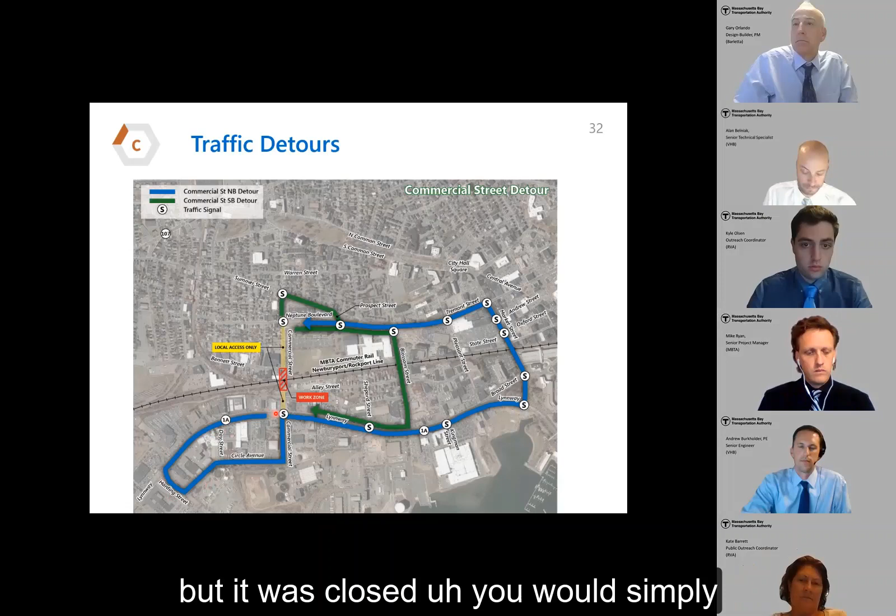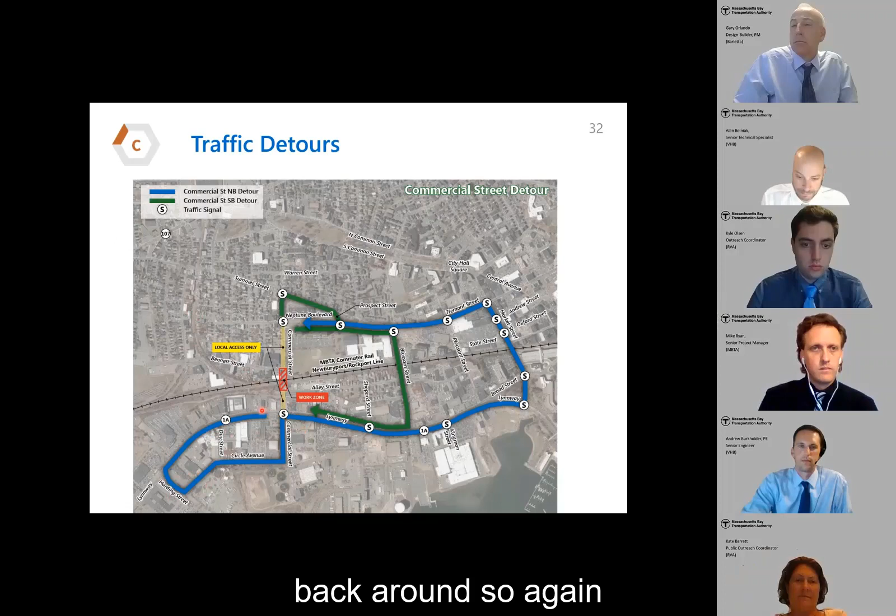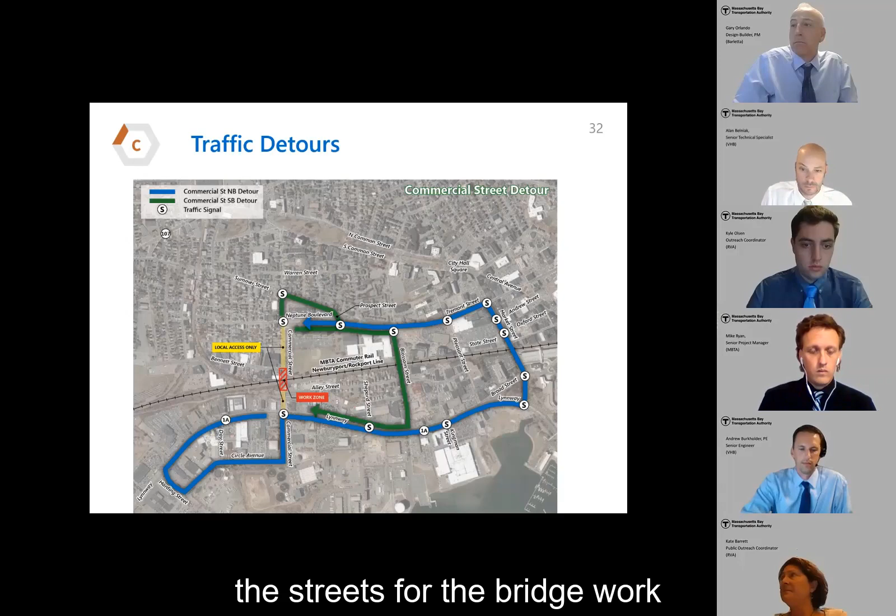If you are traveling northbound on the Lynnway and wanted to take a left onto Commercial Street, but it was closed, you would simply continue northbound on the Lynnway and take a left onto Market Street. If you were traveling towards Commercial Street from the north, you'd essentially do the opposite, using Blossom Street to get yourself underneath the tracks and then onto the Lynnway and back around. So again, we're trying to utilize the existing street network, and it's only for those four weekends where we'd be shutting down the streets for the bridge work.

Local access would be provided along Commercial Street through all of this, though. Next slide, please.

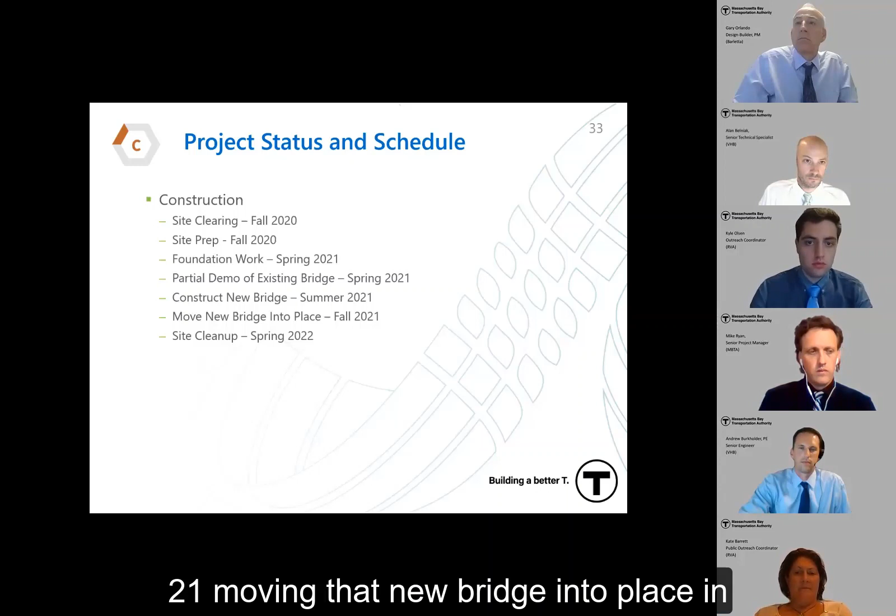Now I'd like to get into our proposed project status and schedule for this particular bridge location. We're looking to do site clearing and site prep this fall, starting over the next several months. Foundation work, including installation of the micropiles Andrew mentioned, would be spring of 2021. Partial demolition of the existing out-of-service tracks would also be spring of 2021. We'd be assembling the new bridge adjacent to the existing bridge next summer, 2021, moving that new bridge into place in fall of 2021. Then site cleanup, final repaving and striping would be spring of 2022.